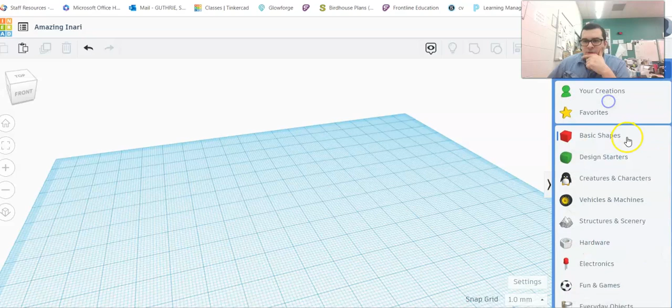Now you can do this by either going to text and typing out your letters, or you can go to design starters and letters and start there. You don't want to use these ones at the top because of all the divides in them. You want to go down here and open up the rest.

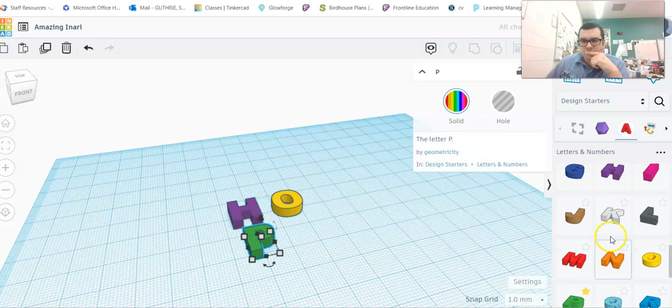So we're going to start with some letters. I'm going to pull in HOPE again. We have all of our letters on the screen.

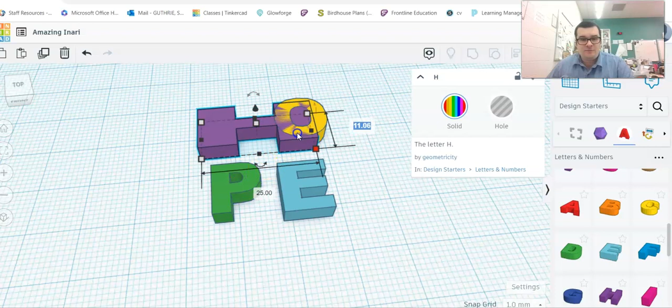We need to first change the sizes. So we want this whole thing to be around 50 by 50 millimeters. So each letter we're going to change to 25 by 25.

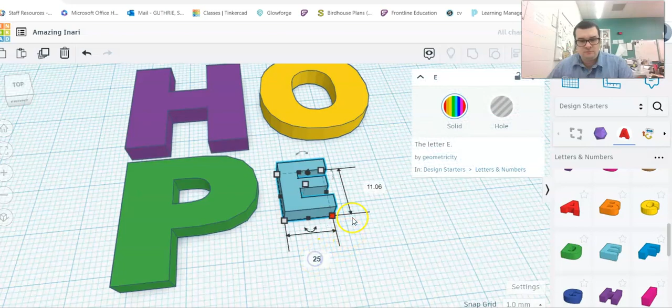Okay, so we have all the letters the size we want. Now we need to make sure they're all lined up. So I'm going to select the bottom two and use the align tool here. Line them up. We also want them to be just touching a little bit.

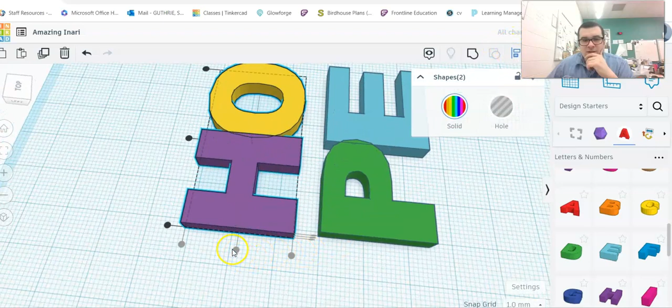So those two are good. I'm going to align these two, and they're already centered, so I'm going to move them down to here. You can see here they're all connected at least a little bit, except for the O here doesn't seem to want to be. To adjust it a little. There we go. Okay, so they're all connected.

Next, we want to raise the height of them. So I'm going to raise it all to about, say about 10 millimeters. That'll make them nice and thick and easy to stand up.

And the last thing you can do is kind of make it a little fancy. Like if you saw my example, I have the O tilted, so I could do this again, tilt it like that, or you could possibly do the E, but you'd have to adjust the E so it still matches up with the P. So certain ways you do it, that's how it would look, and I don't like that one as much, so I'm going to undo that.

But when you have it all together, this is how you'd want it to look. You group it all together, and there we go. So then if we would stand it upright, it'll go like this.

So you can do whatever word or words you want to do. Have to be school appropriate. It doesn't have to be just 4 letters. You can do a bigger word, but as long as the bottom matches up so it can stand.

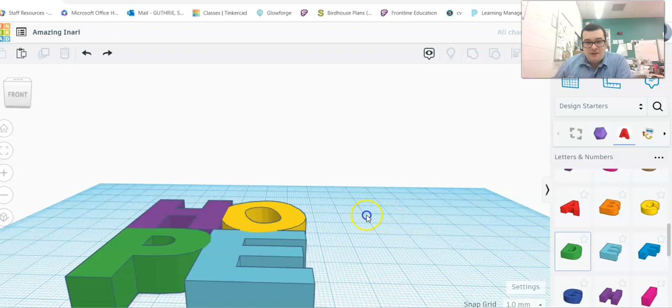So let's say if we had a, I know it's not a word, but just as an example, a D right here. If we would try and print it like this, the weight of this D might make it topple over. So you want an even number of letters. That way it all can stand tall.

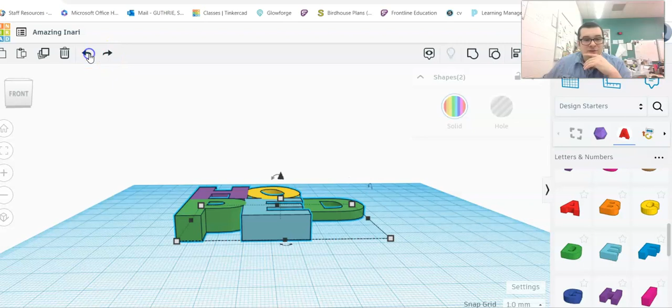But that is it for word art. Let me know if you have any questions.